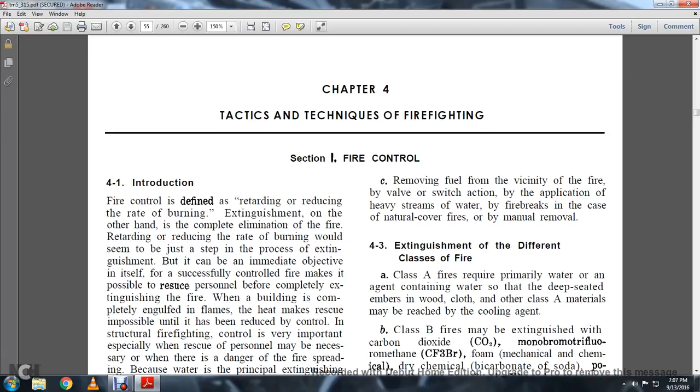For successfully controlled fires, it makes it possible to rescue personnel before completely extinguishing the fire, or when a building is completely engulfed in flames, the heat makes rescue impossible until it has been reduced by control. Structural firefighting control is very important, especially for rescue.

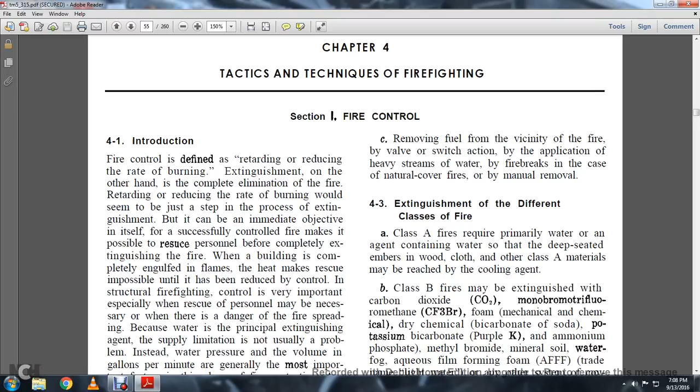Personnel may be necessary whenever there is a danger of fire spreading, because water is the principal extinguishing agent, the supply limitation is not usually a problem. Instead, water pressure and volume in gallons per minute are generally the most important factors in this phase of fire protection.

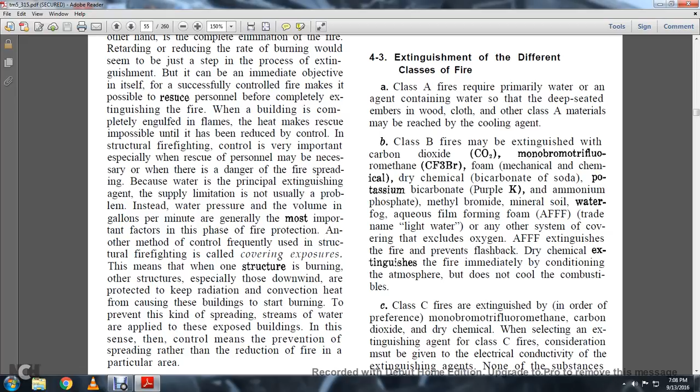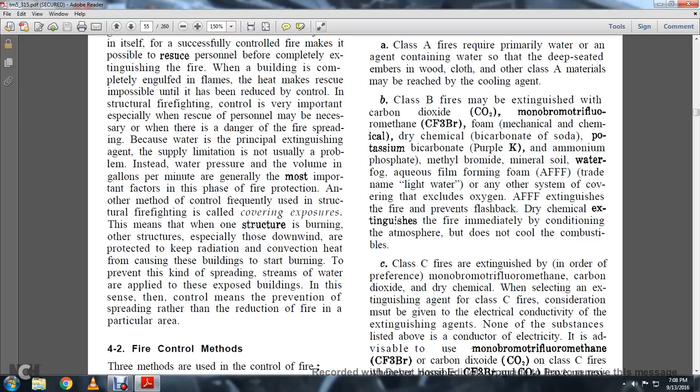Another method of control frequently used in structure firefighting is called covering exposure. This means that while the structure is burning, other structures, especially downwind, are protected to keep radiation and convection heat from causing these buildings to start burning. To prevent that kind of spreading, streams of water are applied to those exposed buildings, in the sense that control means the prevention of spreading rather than reducing the fire in a particular area.

4.2, the fire control methods.

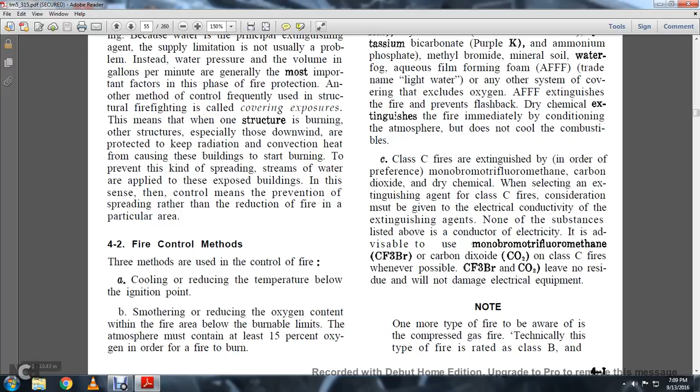4.2 Fire control methods. Three methods are used in controlling fire: cooling, reducing temperature below the ignition point; smothering, reducing oxygen content within the fire area below the burnable limits. The atmosphere must contain at least 15% oxygen in order for a fire to burn.

C. Removal of fuel from the vicinity of the fire by valve or switching action, with the application of heavy streams of water, and fire breaks in case of natural cover fires, by manual removal.

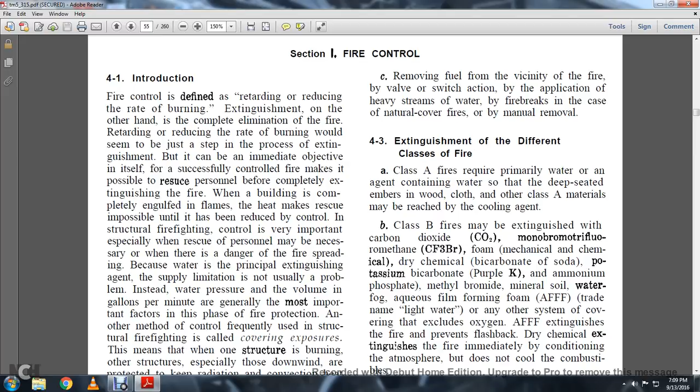4.3 Extinguishment of the different classes of fire. Class A fire requires primarily water or an agent containing water so that deep-seated embers in wood and cloth and other Class A materials may be reached by a cooling agent.

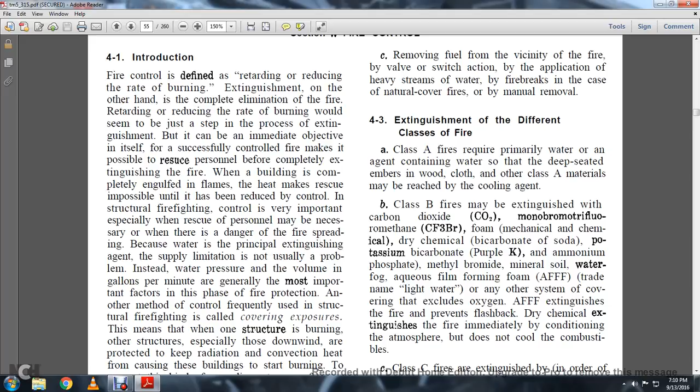Class B fire is extinguished with carbon dioxide, monobromotrifluoromethane or CF3BR, foam (mechanical or chemical), dry chemical (bicarbonate of soda and potassium bicarbonate, Purple K, ammonium phosphate), methyl bromide, mineral soil, water fog, aqueous film forming foam (AFFF, trade name Light Water), or any other system of covering that excludes oxygen. The aqueous film forming foam extinguishes fire and prevents flashback.

Dry chemical extinguishes immediately by the condition of the atmosphere, but does not cool the combustible.

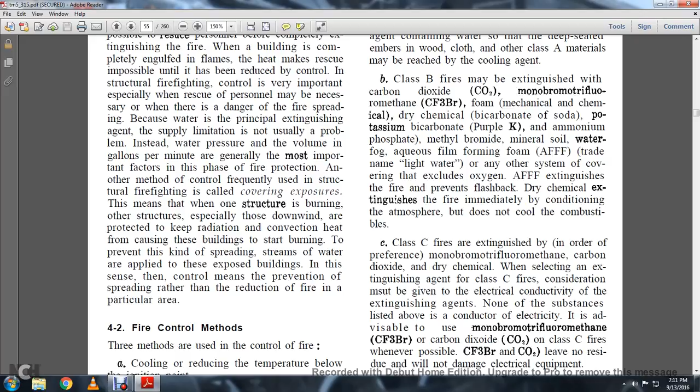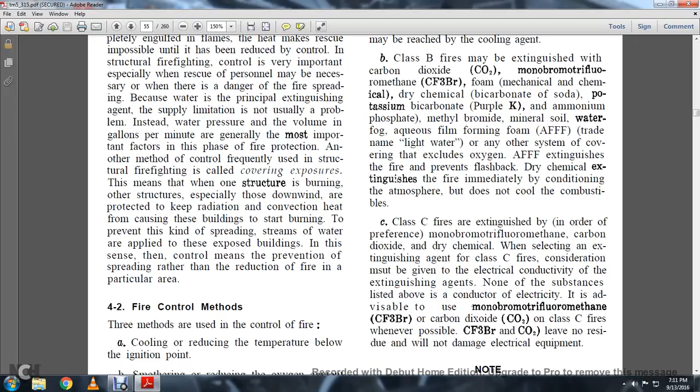For Class C fire extinction, the order of preference is monobromotrifluoromethane, carbon dioxide, or dry chemical. When selecting an extinguishing agent for a Class C fire, consideration must be given to the electrical conductivity of the extinguishing agent, as none of the substances listed above conduct electricity. It is advisable to use monobromotrifluoromethane or carbon dioxide for Class C fires when possible. CF3BR and CO2 leave no residual damage to electrical equipment.

Note: one more type of fire to be aware of is the compressed gas fire. Technically, this type of fire is rated as a Class B. Agents listed for Class B fires are used to extinguish it safely, but the best way of controlling this fire is to remove the fuel supply, which prevents the accumulation of explosive vapors that would occur if the fire were extinguished and the fuel were allowed to continue to flow.

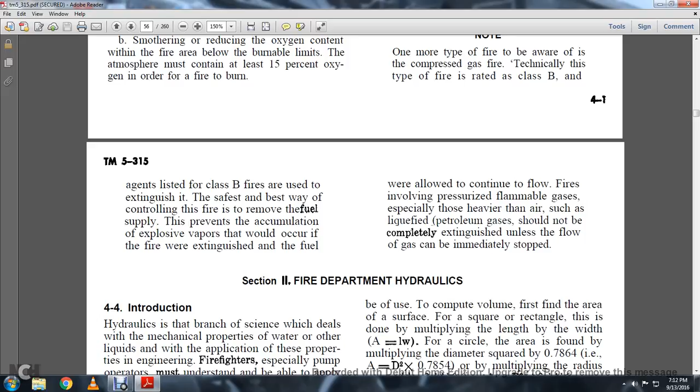Fires involving pressurized flammable gases, especially if heavier than air, such as liquefied petroleum gases, should not be completely extinguished unless the flow of gas can be immediately stopped.

Section 2: Fire Department Hydraulics.